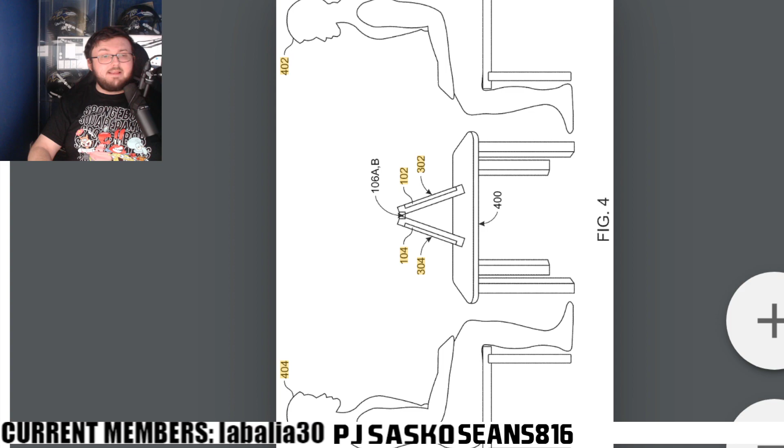Starting off right away, this was posted by Gus33000 on Twitter, and he was referring to these two-part pictures of the patent, saying something from the past, an instruction book, coloring book, painting for dual-screen devices. This patent depicts a dual-screen application for painting with collaborative features and extensive use of postures. He's referring to this picture and this picture right here, the patent, where it is clearly coloring, like a color book pretty much.

You have just a basic coloring technique. It says dual paint here, and it says on this side, so both sides are technically painting. And then you have two people sitting down, with one side painting and the other side painting too. They can paint together if they would like to.

That interests me a lot. The reason why is because this patent right here clearly represents what the Surface Duo 1 and 2 looks like. Now it more or less represents the 2, because look at the actual bezels. The Duo 1's bezels were not this thin. So that's something to take into consideration, that this is more or less what the 2 would be.

But here's what's interesting about this. This patent was actually first thought of, or it says priority to, in 6/29 of 2020. So obviously that was 2 months before the Surface Duo 1 came out. But this patent was not filed by Microsoft until February of this year. So this was filed by Microsoft in February of this year and assigned to them in February of this year. And then it became public on June 2nd of this year. So what is happening here?

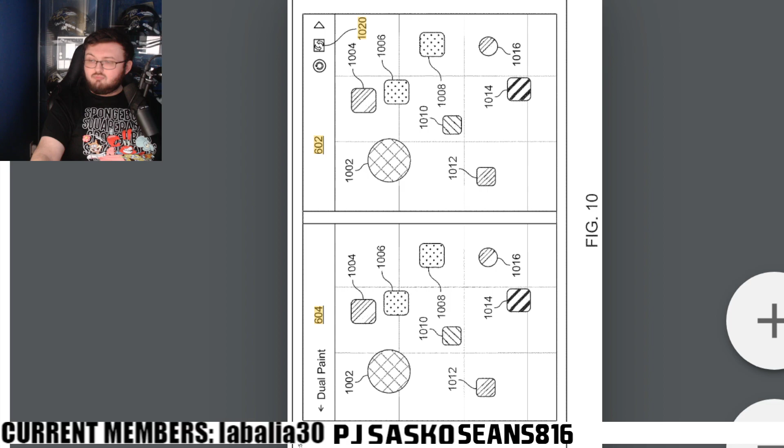So if we go through here, you can see they are showing a lot of painting, dual painting techniques on this device. So pretty much the idea of this concept could be more or less, like he said, a coloring book, because that's really what it looks like at the end of the day. This patent is really focused on that.

Now, taking a look at what this patent actually reads, here is what it actually says: This is a dual screen computing device, includes two separate displays that are coupled to an interconnecting hinge. A hinge detector detects movement or position of the hinge, and the positions of the displays may be determined based on the hinge movement or position. The positions of the displays relative to each other may be used to determine which mode of operation the dual screen computing device is operating.

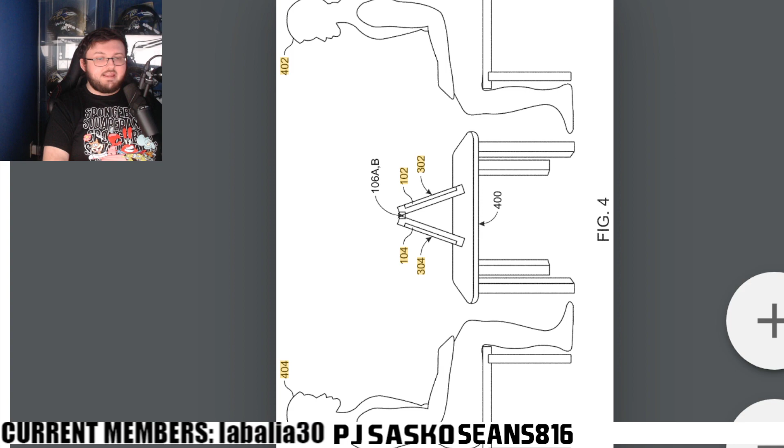Obviously, tent mode, open, close, etc. Additionally, the dual screen computing device may include various sensors that detect different environments, orientations, locations, and device-specific information. Applications are configured to operate differently based on the modes of operation, and optionally, the sensor data detected by the sensor. So what this looks like to me, right, is the Surface Neo.

This looks like what would have been the Surface Neo if it wasn't canceled, pushed back, or delayed. We don't think we're going to get it, let's be honest. And this is what I really feel like Microsoft needs to do.

Because, let's be honest, Samsung right now is coming out with a foldable laptop of some kind. They've shown it off at different tech events, and honestly it's really freaking dope. They're using the foldable screen technology from the Z Fold 4, Z Fold 3, Z Flip 4, and Z Flip 3, except since it's bigger and has a lot more space, it'll be a lot more durable than on those two devices. They're going to bring us a foldable laptop.

This would be a cool concept for Microsoft to do the same exact thing, but with Windows 11, and bring it in this type of device, which again very much represents the Surface Neo, because of the size. I would love to see that.

And again, I know you might say, what's the point? So you're going to have one screen be the actual computer and the other screen be the keyboard? No, it's the same concept as the Surface Duo or the Surface Duo 1 or 2.

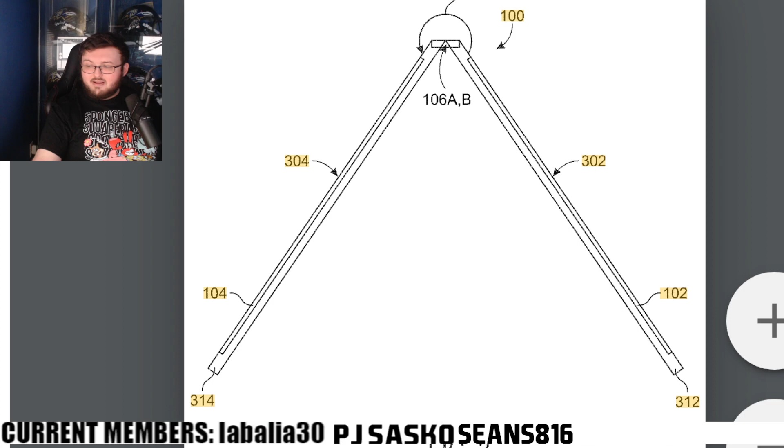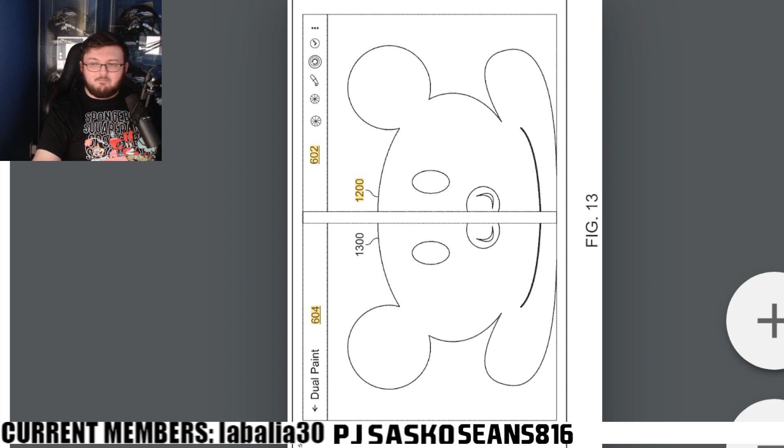Even though, yes, it might never happen and this might just be a pipe dream in all honesty, it definitely still does interest me if they could do something like this or something like this concept.

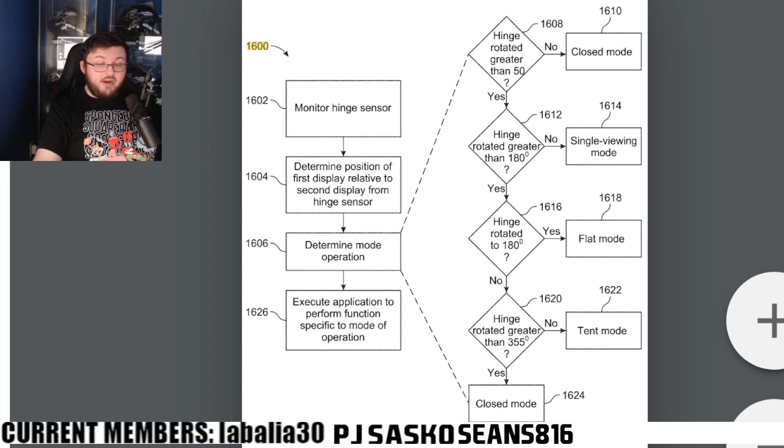We already know Surface Duo 1 and 2 can run Windows 11, Gus 33000 has already proven that. Now give us an actual laptop type device that can do the same concept, be very skinny and small, and be a very beautiful device. I would personally love to see that.